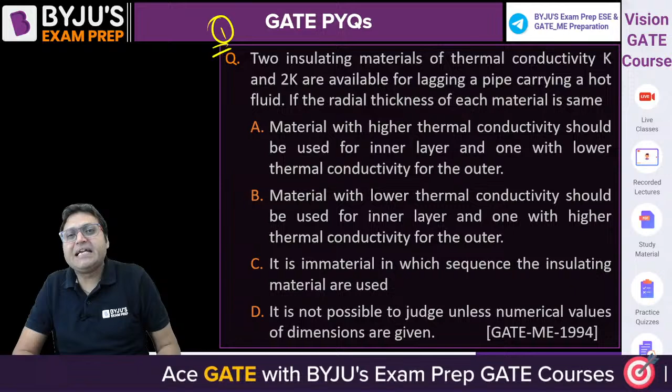So there is question number 1 on your screen. The question is from the critical insulation. There are two insulating materials of thermal conductivity K and 2K, which are available for lagging a pipe. What is lagging? Lagging is called as heavy insulation. And lagging reduces the heat transfer rate. So these two materials are available for lagging a pipe which is carrying a hot fluid. If the radial thickness of each material is same, what will be the answer? This question was asked in GATE 1994.

So option A says material with higher thermal conductivity should be used for inner layer and one with lower thermal conductivity for the outer layer. Material with lower thermal conductivity should be used for inner layer and one with higher thermal conductivity for outer layer. It is unimportant whatever the sequence of the insulating material used. And option D says it is impossible to judge unless the numerical values of dimensions are given. Yes, tell me which of the following options is correct. There are two parameters. One is lagging. Lagging is called as heavy insulation.

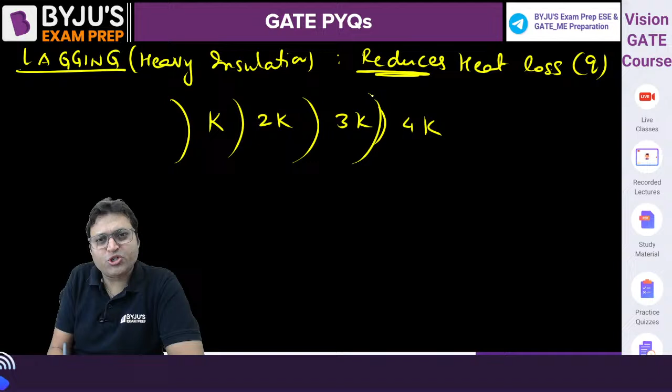It reduces heat loss. Lagging reduces heat loss or heat transfer rate. To decrease the rate of heat transfer, to reduce the heat transfer rate, the material with the lower thermal conductivity should be the inner layer, and then 2K, then 3K, and like this 4K. This should be the order of the insulation.

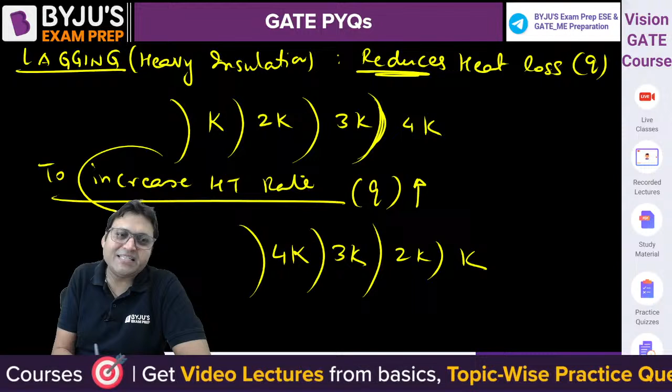But if we want to increase the heat transfer rate, how should the insulation be done? The material with the higher thermal conductivity should be the first material, then 3K, then 2K, then K, like this. So if our objective is to increase the rate of heat transfer, then the 4K material should be the inner layer, 3K the outer layer, 2K the next outer layer, and so on.

But because the question is all about lagging, this is where people commit mistakes. They do not understand. Lagging means heavy insulation which reduces the heat loss. So the objective of lagging is to reduce the rate of heat transfer. And if you want to reduce the rate of heat transfer, the first material should be highly insulating, meaning it should have the least value of thermal conductivity. B is the answer, Kumar.

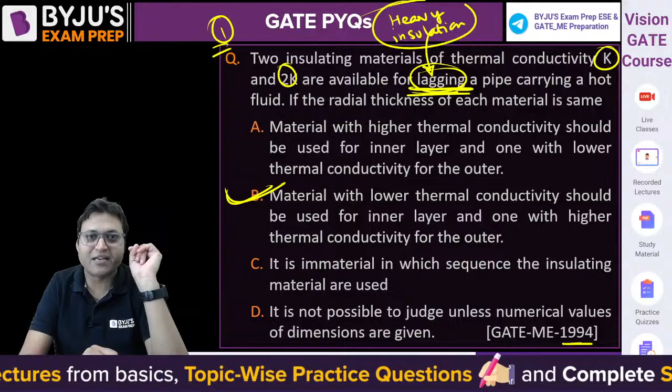Lagging means heavy insulation. Think of it like this: the first material is the highly effective material. If we want to insulate a system, the first insulating material will be the highly effective one, then the second will be less effective, the third less effective. So if the objective is to increase the rate of heat transfer, the material with the highest thermal conductivity will be the first material. But if the objective is to reduce the rate of heat transfer, the highly insulating material should be the first material.

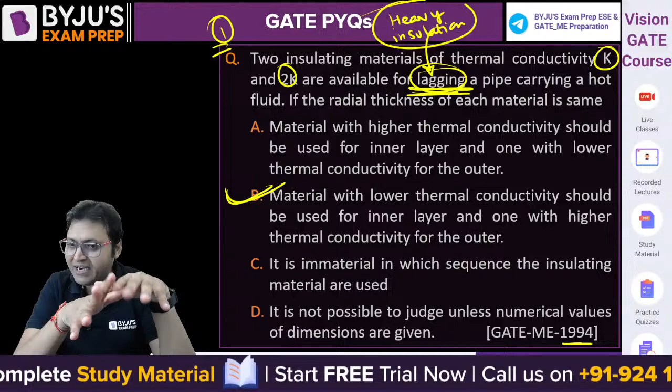So B will be the correct answer because of the word lagging which is mentioned over here. I hope it is clear, right? Can we proceed further?

Now the next question. For a given heat flow and for the same thickness, the temperature drop across the material will be.

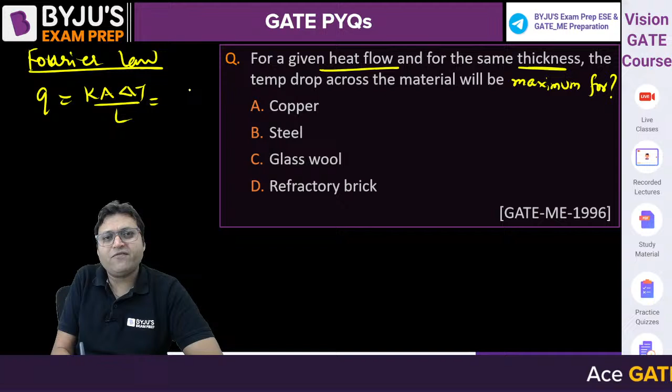So can we say, according to Fourier law? Fourier law is used for conduction. So Q is equal to KA delta T by L. For the given heat flow, Q is constant. Same thickness, L is constant. Area is not mentioned, so it will be taken as constant. So delta T is inversely proportional to K. As K increases, delta T will decrease.

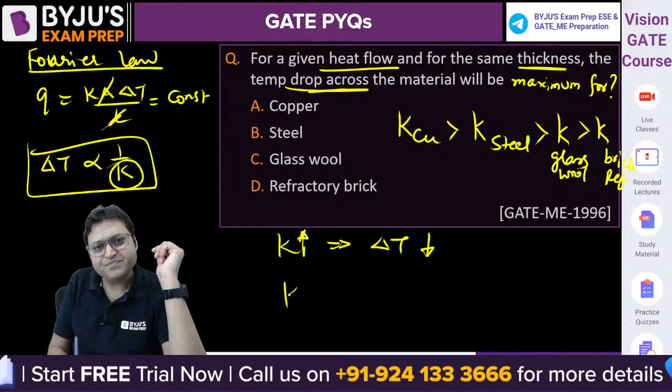Thermal conductivity for copper is maximum, it is a pure metal. Then steel, that is an alloy. Then glass wool. And then refractory brick, it is highly insulating. So if we want the temperature drop to be maximum, the material will be refractory brick. It is a thermal insulator, used for insulating furnace walls. So D will be better.

People have a doubt in C and D. Glass wool will have more thermal conductivity. Refractory brick will have the least value of thermal conductivity. That is why option D will be the answer. I hope it is clear, right? Yes. Ritika, Rajput, Maniket, D will be the answer.

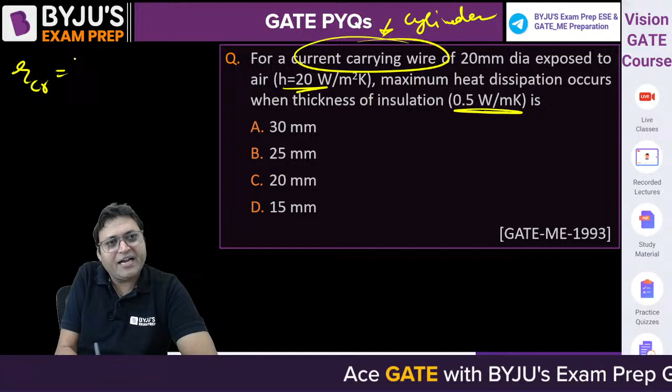The insulating material has a thermal conductivity. So the critical radius of insulation is K of the insulating material upon H0. What is the thermal conductivity of the insulating material? 0.5. What is H0? That is 20. What is 0.5 by 20?

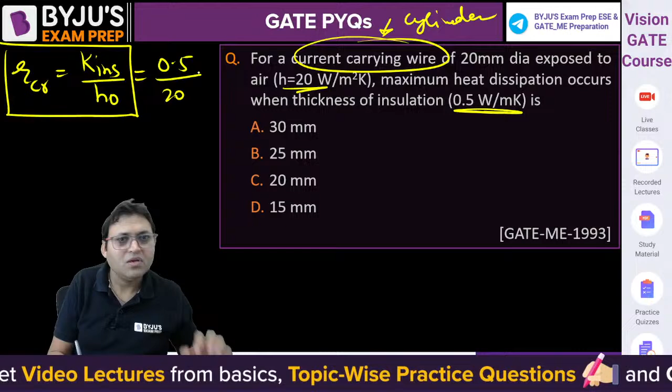Or that is meter. So it will be 500 by 20 millimeter. That is RCR. So critical radius of insulation is 25 mm. Now, where people commit mistakes: it is the thickness of insulation which is asked. It is not the radius of insulation which is asked.

So, critical thickness of insulation is RCR minus R0. Critical thickness of insulation: 25 minus... diameter is 20 mm. D0 is equal to 20 mm, so R0 will be equal to 10 mm. Do not commit these types of mistakes. 25 minus 10 mm, that will be the critical thickness of insulation. 15 mm will be the answer. D will be the answer.

Yes, well done. Maniket, what happened? Yes, Rajput, D will be the answer. Kumar, it is not B, it is D.

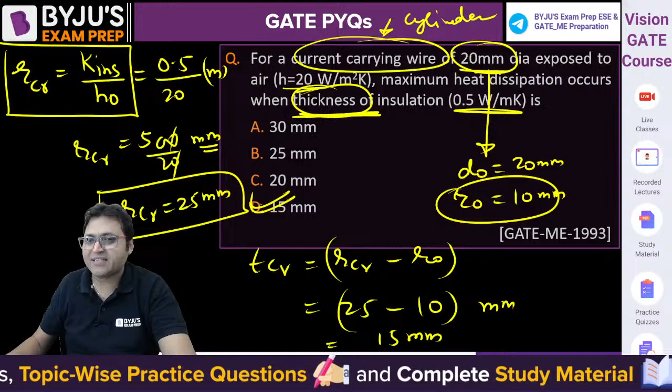It is about the critical thickness, not the critical radius, which was asked in GATE 93. I hope it is clear. So do not misunderstand the question and do not commit silly mistakes. The next one,

asked in GATE 1998. The temperature variation under steady state heat conduction across a composite slab of two materials. There is a composite slab in series combination, isn't it? These slabs are connected in series like this, and heat flow is taking place like this. Q will remain constant because it is a series combination, with thermal conductivities K1 and K2. The first material has thermal conductivity K1 and the second has K2.

Then which of the following statements holds true? K1 cannot be equal to K2. K1 cannot be 0. Now, we can say Q is equal to minus KA into dT by dx is constant, because Q is constant due to the series combination. Area is also constant. There is no heat generation. There is no heat stored in the system. That is why Q, the rate of heat transfer, will be constant.

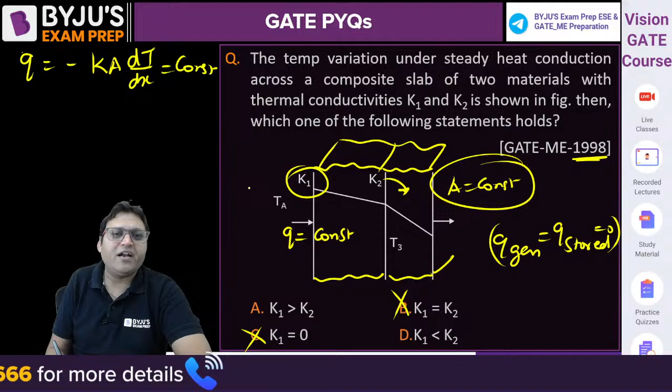So we can say K will be inversely proportional to dT by dx. dT by dx is the slope. So the more the slope, the less will be K. Here the slope is less for material 1, do you agree? More horizontal means less slope. So dT by dx for 1 will be less than dT by dx for 2, which means K1 will be greater than K2.

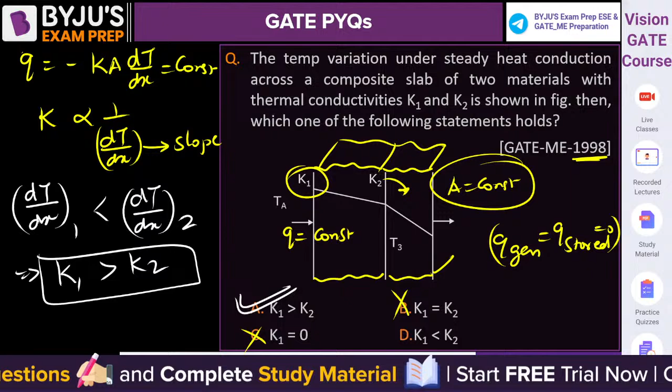Option A, yes, everybody gave me the correct answer. Hi Shiva, Maniket, Rajput, Kumar, well done guys, keep it up. Everyone, please do participate. Again, the question is from insulation. Earlier, a lot of questions used to be asked from critical insulation. Now, what will be the answer to this one?

This was asked in GATE 1999. It is proposed to coat a 1 mm diameter wire, so R0 is 0.5 mm, with enamel paint. The thermal conductivity of the paint is 0.1, to increase the heat transfer with air. If the air side heat transfer coefficient H is 100, the optimum thickness of enamel paint should be?

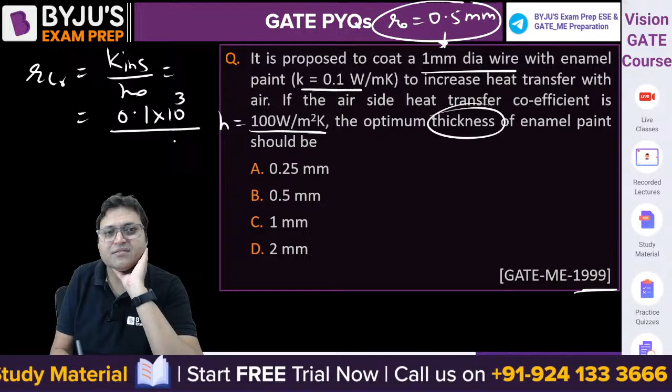Find out RCR first: K insulation by H0. What is K insulation? That is 0.1 into 10 to the power 3 if we want to convert it into millimeter, upon H, that is 100 millimeter. So it is 100 by 100, that is 1 mm. RCR will be equal to 1 mm, and critical thickness is RCR minus R0. So 1 minus 0.5 mm.

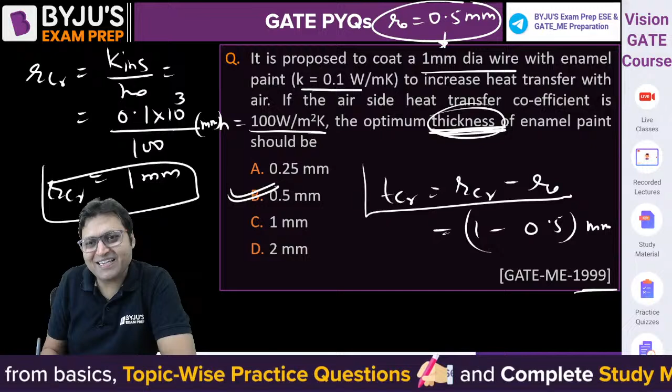B will be the answer. Why are you guys saying C? Thickness, thickness, thickness. Critical thickness or optimum thickness is RCR minus R0.

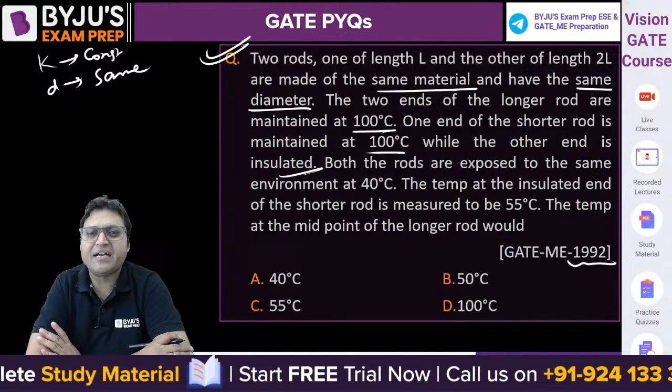Both rods are made up of the same material, which means thermal conductivity is constant for both, and they have the same diameter. The two ends of the longer rod are maintained at 100 degrees Celsius. One end of the shorter rod is maintained at 100 degrees Celsius while the other end is insulated. Both rods are exposed to the same environment at 40 degrees Celsius.

H is also constant. Which chapter is this question from? The question is from fin theory.

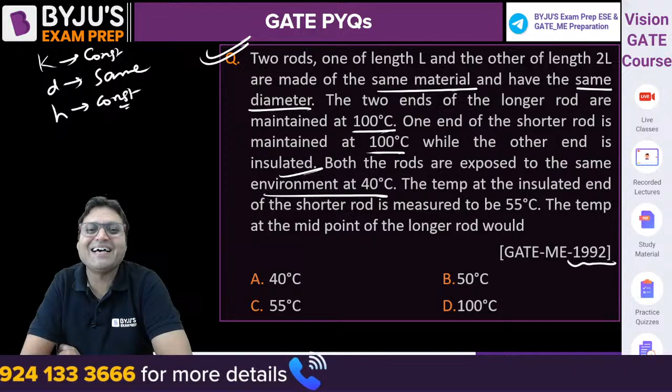Well done. The temperature at the insulated end of the shorter rod is measured to be 55 degrees Celsius. What is the temperature at the midpoint of the longer rod?

Tell me, what should be the answer? Which formula are you supposed to apply here? What will be the answer to this one? Can you give me the answer? Everybody, please give it a try.

Whenever a rod, a bar, or a fin is exposed to the environment, one end of the rod or the bar is at a temperature source or heat source, and the other end, with its periphery, is exposed to the environment - this is a case of fin theory.

What should be the answer? Look, if there is a rod connected to a heat source at both ends - this is Ts, this is Ts - the length is, let us say, 2L.

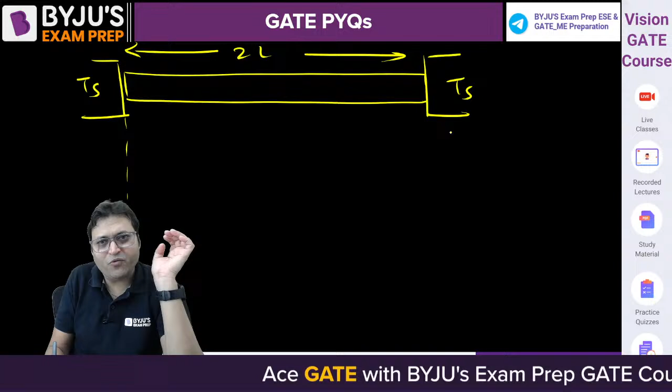If we draw the temperature profile, then it will look like this. This is Ts, this is also the same temperature Ts, and the temperature is minimum here at the center. This is how the temperature profile looks, and Q will be 0 here at the center.

So this longer rod can be replaced by two rods, because at this point Q is equal to 0, which means we can assume it to be insulated. So it can be treated as two shorter rods of length L.

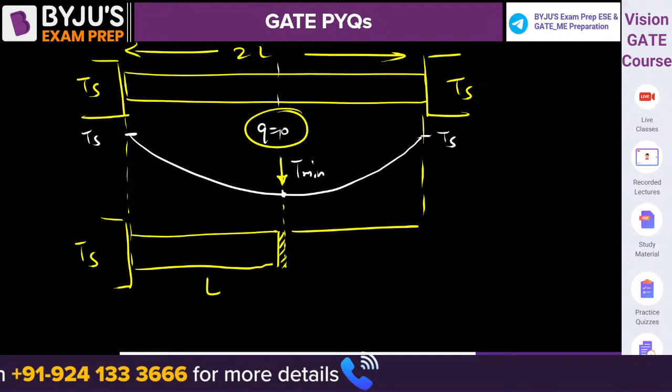One end is maintained at Ts temperature and the other end is insulated. And there is another rod of the same length L, with one end exposed to this and the other end insulated. So the temperature profile will be the same for these.

Now the question says - what does the question say? The temperature at the insulated tip is 55 degrees Celsius. Don't you think that this temperature is 55 degrees Celsius?

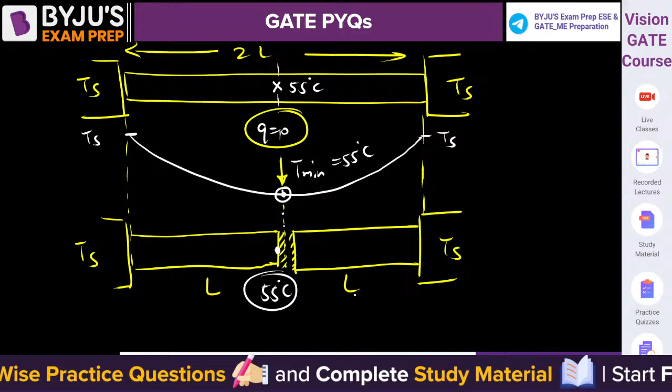If the temperature at the insulated tip for the shorter rod is 55, then at the midpoint of the longer rod the temperature will also be 55 degrees Celsius. Won't it be? Do you guys understand it or not?

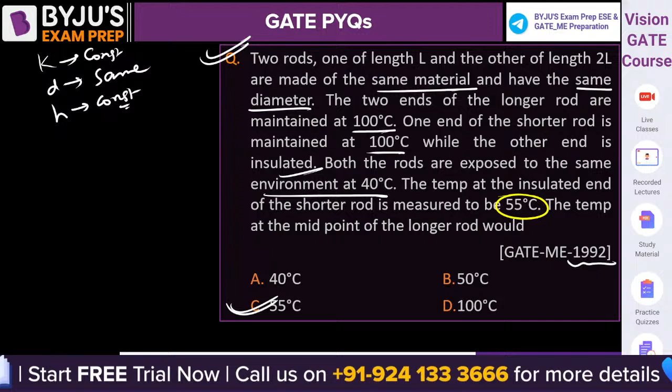So it is not about any calculation as such. The question is not about any type of calculation, but if you understand the basic concept that the longer rod can be treated as two small rods joined together at the insulated tip, then the temperature profile will be the same for both situations.

I hope it is clear. Yes or no? Please do let me know if it is clear or not. Is this all clear to everyone? Can we proceed further? Did you understand? 55 degrees Celsius will be the answer.

The next question was asked for 5 marks. Let us try to solve this one. Some of the subjective questions are also important to improve your understanding, so this is the subjective type of question.

Earlier there used to be some questions in GATE which used to be asked for 5 marks, so this is one of those questions. There is an iron rod - rod means it is again the fin theory.

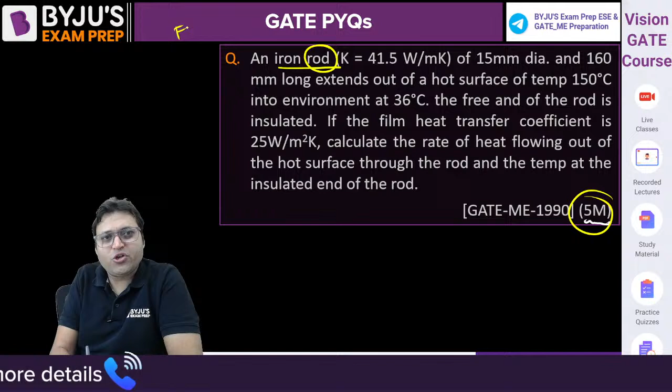There is an iron rod. Rod means a cylindrical shape. Thermal conductivity is given, diameter is 15 mm and length is 160 mm.

It is a finite length fin. It extends out of a hot surface of temperature 150 degrees Celsius, that is Ts, into the environment, that is T infinity. The free end of the rod is insulated.

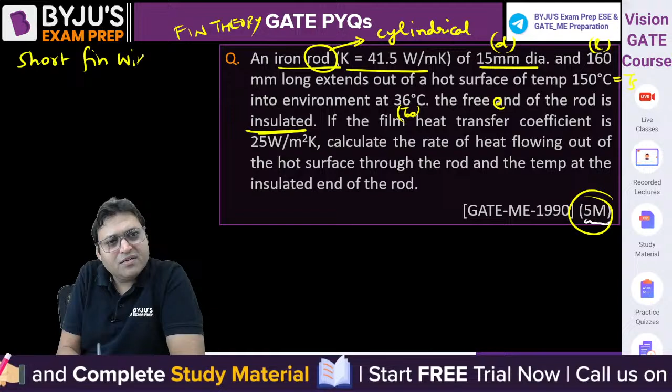It is an example of a short fin with insulated tip. This is an example of a short fin with insulated tip.

If the film heat transfer coefficient, that is H, is given as 25 watt per meter square Kelvin, calculate the rate of heat flowing out of the hot surface through the rod and the temperature at the insulated end of the rod. So we need to find two things: Q fin and the temperature at the tip, or minimum temperature - the temperature at the insulated tip.

These are the two things which need to be calculated. Q fin is equal to K into cross sectional area A into M into theta s into tan hyperbolic ml. This will be the formula for Q fin. And T at tip minus T infinity upon Ts minus T infinity is equal to 1 upon cos hyperbolic ml. This will give you T tip.

These are the two formulas to be used. First of all, find out the value of M. Can you find out the value of M? M is equal to under root of HP by K into cross sectional area, where P is the perimeter. For a circular cross section fin, it will be 4H by K into diameter. What is the value of M?

That is the fin constant, with unit meter inverse. Take under root of 4 into H, putting all parameters in SI units. Thermal conductivity is 41.5, diameter D is 15 mm, that is 0.015 meter. What is the value of M? Do find the value of M, in meter inverse. That is called the fin constant, also known as the fin parameter.

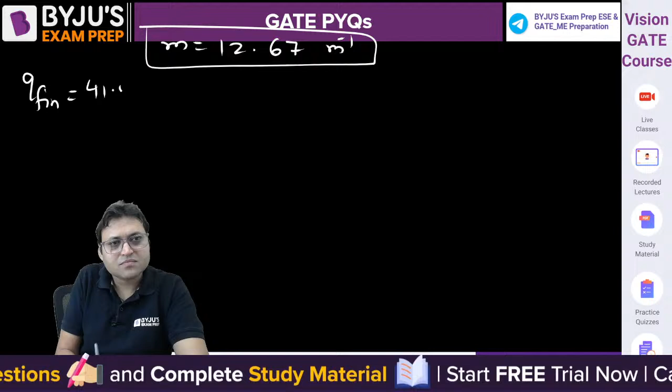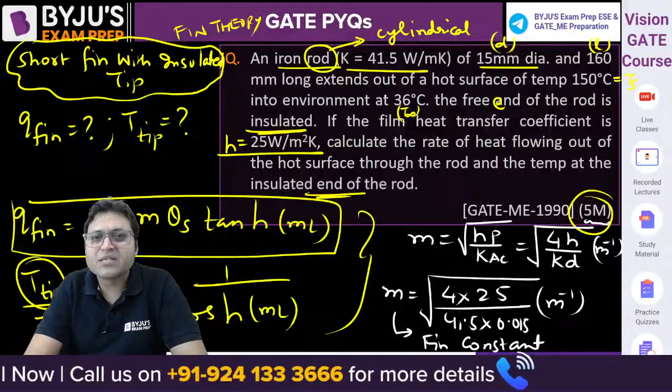Then Q fin is equal to K, where K is the thermal conductivity of the fin, which is 41.5, into area pi by 4 into 0.015 square, into M which is 12.67, into theta s, that is Ts minus T infinity. Ts minus T infinity is 150 minus 36, into tan hyperbolic of 12.67 into L. What is L? L is 160 mm, that is 0.16.

0.16. What will be the final answer for Q fin? Can you do the calculation? Let me know the answer for Q fin: pi by 4 into 0.015 square into 41.5, with tan hyperbolic of 12.67 into 0.16, multiplied by 150 minus 36.

Are you getting 10.23 watt? Are you guys getting the final answer? It is something around 10.23 watt. That is Q fin.

And T at the tip minus T infinity upon Ts minus T infinity, that is 150 minus 36, is equal to 1 upon cos hyperbolic of m into L, where m is 12.67 and L is 0.16. So from here we can find out T tip. What is the value of T tip? Can you solve for T tip? See, 12.67 into 0.16, then cos hyperbolic of ml, then (150 minus 36 divided by this answer) plus 36.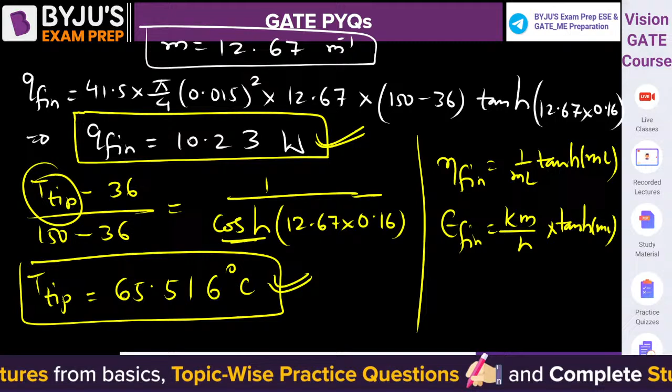65.6, 65.5 will be the answer. Right? Let us move to the next one.

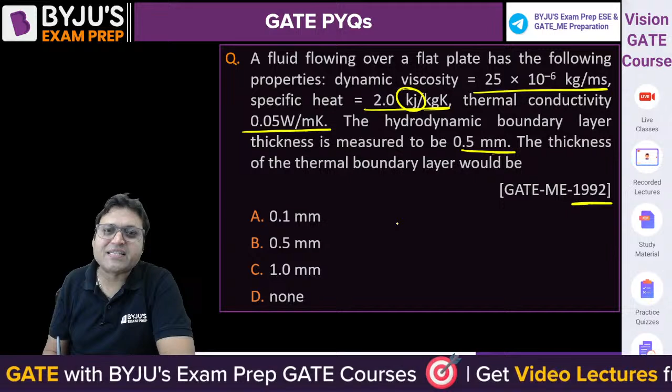Next is from convection. Solve this question and tell me. A fluid flowing over a flat plate - this was asked in GATE 1992. A fluid which is flowing over a flat plate has the following properties: dynamic viscosity is given by 25 into 10 to the power minus 6, specific heat in kilojoule is given, thermal conductivity is given. The hydrodynamic boundary layer thickness is measured to be 0.5 mm. The thickness of the thermal boundary layer is to be found. So the hydrodynamic or velocity boundary layer and the thermal boundary layer thickness are connected by Prandtl number, so we need to calculate the Prandtl number.

Hi Uma, welcome. I am all good.

How are you? So what is Prandtl number? Prandtl number is kinematic viscosity upon thermal diffusivity. What is kinematic viscosity? Dynamic viscosity per unit density. Alpha is K by rho into Cp.

If you simplify this, the Prandtl number expression is mu into Cp divided by thermal conductivity of the fluid. This is a property of the fluid. Calculate the value of Prandtl number using all the parameters in their SI unit.

Dynamic viscosity is 25 into 10 to the power minus 6. Cp is 2000 joule per kg Kelvin. Thermal conductivity is 0.05. What is the value of Prandtl number? Everyone, please solve for Prandtl number. What is the Prandtl number?

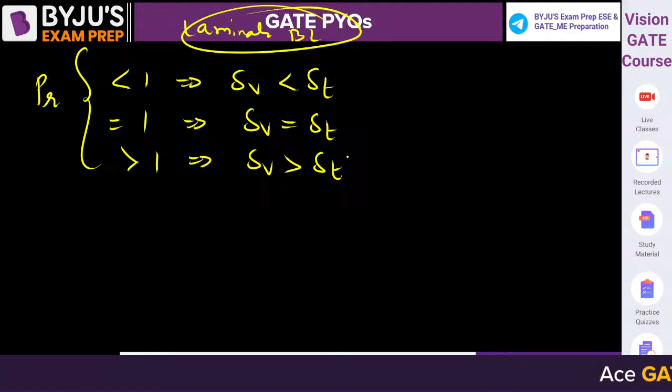For laminar boundary layer, when the Prandtl number is less than 1, then delta V is less than delta T. When Prandtl number is equal to 1, then delta V is equal to delta T. When Prandtl number is greater than 1, then delta V will be greater than delta T. This is how Prandtl number is related to boundary layer thickness.

Prandtl number should come out as 1. Is it not coming as 1? It should be 1. Is it coming as 1 or 10,000? Maniket, is it 1 or 10,000?

25 into 2000, put all the parameters in their SI unit. 2 kilojoule needs to be converted to joule per kg Kelvin. This is the mistake students often make. Put all the given parameters in their SI unit only.

So that is 1, because the Prandtl number is equal to 1, then delta V is equal to delta T. If the hydrodynamic boundary layer thickness is 0.5 mm, then the thermal boundary layer thickness will also be 0.5 mm.

Yes, the answer B is correct. B will be the right answer. Getting it? So it does not matter.

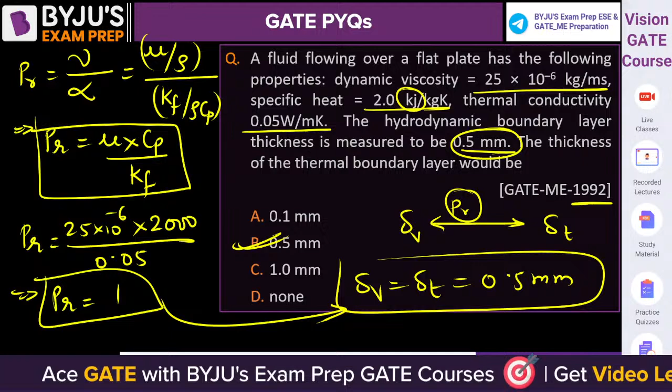It does not matter whether the boundary layer is laminar or turbulent, because for turbulent boundary layer, delta V is always equal to delta T. It is not a function of Prandtl number. For turbulent boundary layer, delta V is always equal to delta T, irrespective of the Prandtl number.

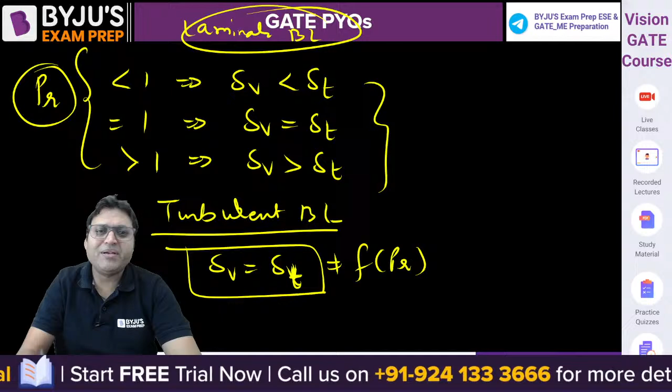But if it is laminar boundary layer, then Prandtl number decides. Since Prandtl number is coming out to be 1 only, it means delta V is equal to delta T, whether it is a laminar boundary layer or a turbulent boundary layer. It does not matter. I hope this is clear.

The next one, can you match the following?

What is Grashof number? Grashof number is the ratio of buoyant force to viscous force, isn't it? Reynolds number is the ratio of inertia force to viscous force. Here, inertia force is replaced by buoyant force, and Reynolds number is used in forced convection.

And Grashof number is used in free or natural convection. So Grashof number is in free convection, 3, A3. A3. Schmidt number, what is Schmidt number?

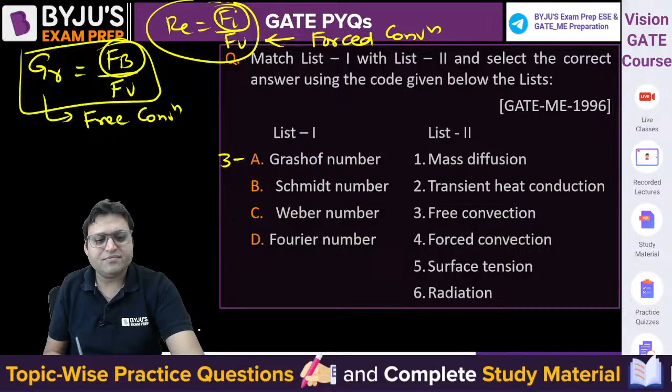Look, there are three properties: kinematic viscosity, thermal diffusivity, and mass diffusivity. Kinematic viscosity is momentum diffusivity. Thermal diffusivity is alpha, and mass diffusivity is D. All of these have the same unit, meter square per second.

So Prandtl number is equal to kinematic viscosity by alpha. Lewis number is equal to alpha by D. This is Prandtl number, this is Lewis number, the ratio of alpha by D. And Schmidt number is equal to kinematic viscosity by D, mass diffusivity.

That is called Schmidt number, so it is used in mass transfer. Lewis number and Schmidt number are both used in mass transfer.

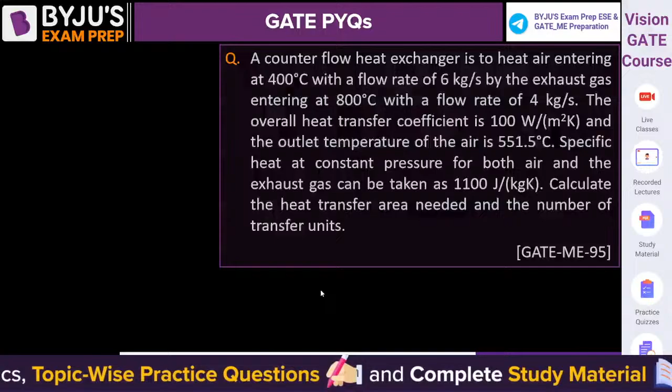So for B, Schmidt number is for mass diffusion. B1.

Weber number comes from fluid mechanics. Weber number is related with surface tension. What is Weber number? Weber number is the ratio of inertia force by surface tension force, under root. So here it is the surface tension.

So C5. And Fourier number is used in transient heat conduction. What is Fourier number? It is the ratio of thermal conductivity to heat transfer, or the ratio of conduction to the heat storage capacity, used in transient heat conduction.

3152. Yes, Rajput, well done. 3152. Yes, Shiva, good. 3152.

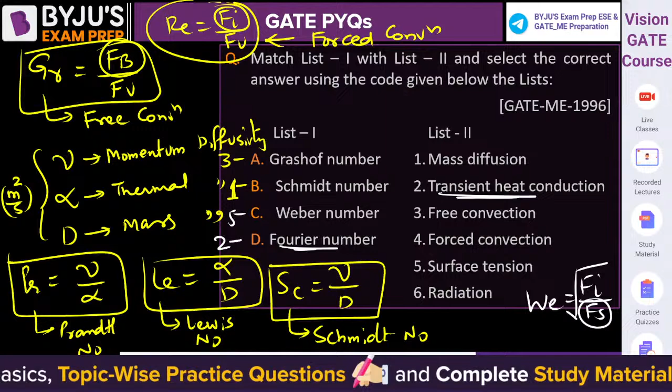Is there buffering happening? Is it buffering? Are you facing issues?

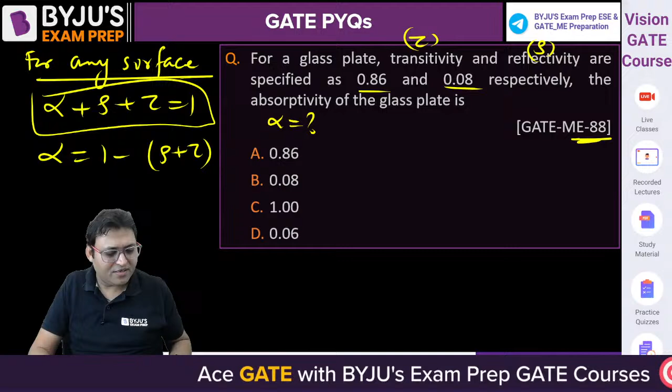So 1 minus, answer 0.06. D will be the correct answer. What is a diffuse radiation surface? When do we call the surface to be diffuse? Radiation in all the direction, that is called as diffuse. The opposite of specular surface, if the radiation is taking place in all the direction, it is called as diffuse surface. So radiation intensity independent of angle.

Radiation intensity independent of angle. It is same in all the direction. That is called as diffuse radiation. Option A. Yes, Shiva Rajput, A will be the correct answer. And there is another surface which is called as gray surface. Gray surface, the radiation independent of wavelength. That is called as gray surface.

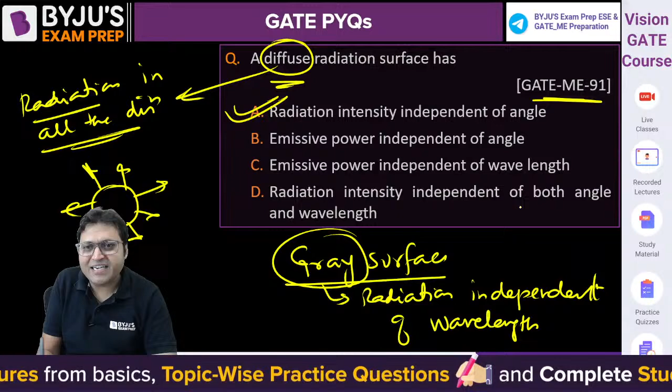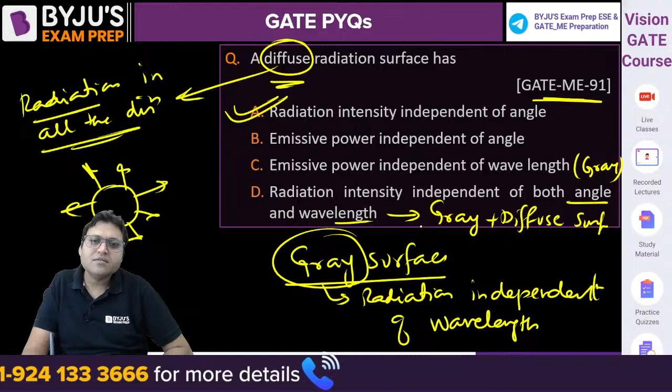So the surfaces we analyze in our radiation, we assume the surface to be diffuse and gray. So if the radiation intensity is independent of both the angle and wavelength, that is called as diffuse and gray surface. D will be for gray plus diffuse surface. Emissive power independent of wavelength, that is called as gray. So A will be the answer, right?

The next one, this was asked in GATE 94. The shape factors with themselves of two infinitely long black body concentric cylinders. This is 1, this is 2. The surface 1 is insulated from inside and surface 2 is insulated from outside.

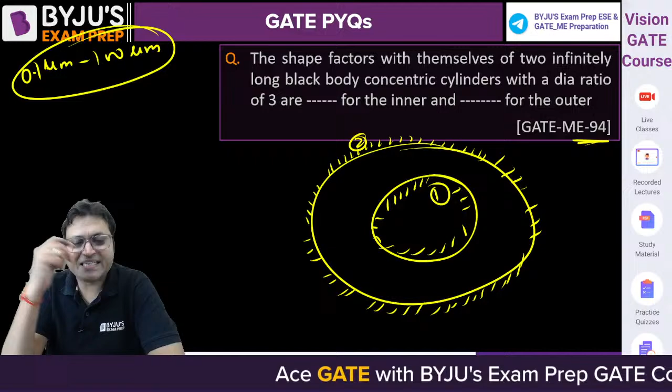The shape factor with themselves of the two infinitely long black body concentric cylinders with the diameter ratio D2 by D1 equal to 3. For the inner, what is the self shape factor? Shape factor with themselves means self shape factor. So F11, inner means F11. Isn't it 0 because it is convex? It will be 0 for the inner. And what is F22? This can be treated as enclosure. So F22 is 1 minus A1 by A2, so 1 minus pi D1L by pi D2L, 1 minus D1 by D2.

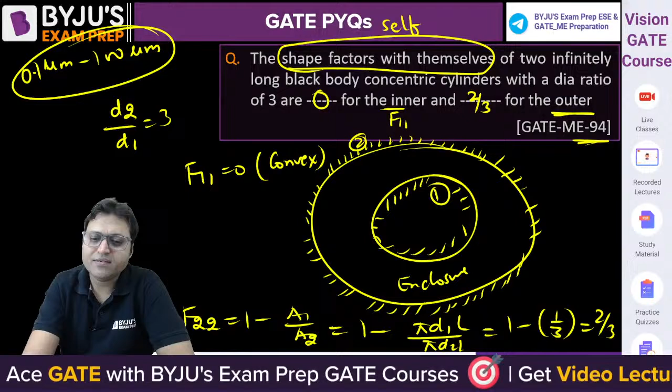What is D1 by D2? That is 1 minus 1 by 3, that is 2 by 3. So for the outer surface, it will be 2 by 3. For the inner surface, it will be 0. 0 and 2 by 3. Clear? Right? The next one.

The radiative heat transfer rate per unit area, that is Q dash flux, radiation heat flux between two plane parallel gray surfaces. They are plane parallel gray surfaces. It means A1 is equal to A2 is constant A.

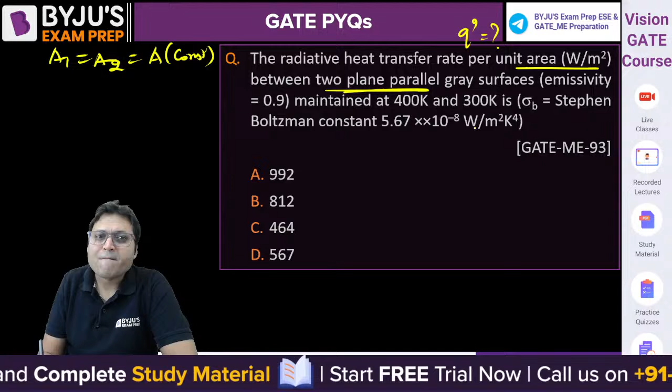Emissivity of both are 0.9. Epsilon 1 is equal to epsilon 2 is 0.9. That is epsilon. Maintained at 400 Kelvin and 300 Kelvin, T1 and T2. So can we say Q is equal to sigma (T1 to the power 4 minus T2 to the power 4) upon (1 minus epsilon 1 upon epsilon 1 A1 plus 1 upon A1 F1-2 plus 1 minus epsilon 2 upon epsilon 2 A2).

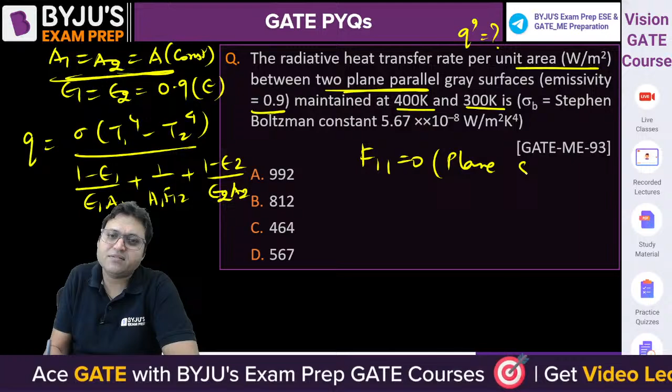Because A1 is equal to A2 and F1-1 is equal to 0 because they are plane surfaces, F1-2 is equal to 1. So from here we can say Q dash, which is Q by A, with epsilon 1 equal to epsilon 2, is sigma into (T1 to the power 4 minus T2 to the power 4) upon (2 by epsilon minus 1). This is the formula we are supposed to apply. Can you apply the formula and get me the answer?

Sigma is 5.67 into 10 to the power minus 8. T1 is 400, T2 is 300, epsilon is 0.9. (400 to the power 4 minus 300 to the power 4) upon (2 upon 0.9 minus 1) watt per meter square. What will be the answer in watt per meter square? Can you solve it? Everyone, please give it a try and let me know the answer. Yes, quickly do let me know the answer.

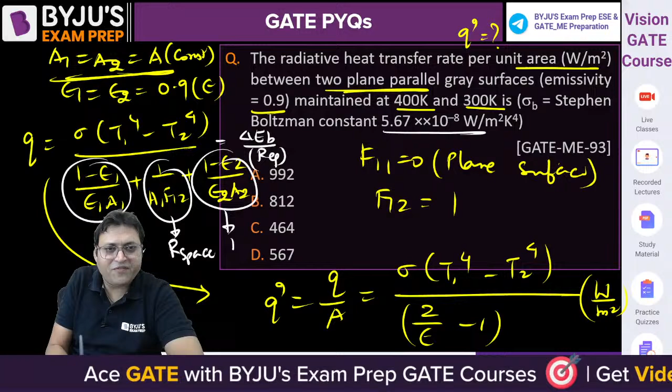Waiting for your answer, guys. Have you understood the concept? This is delta EB upon R equivalent. There are three resistances. This is the surface resistance, this is space resistance, and this is again the surface resistance. Because they are connected in series, so equivalent resistance. Are you getting 812? B will be the answer, 812. Yes, Shiva, well done, good. What about others?

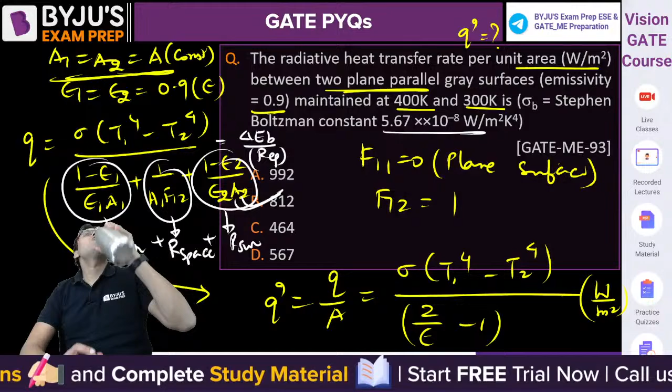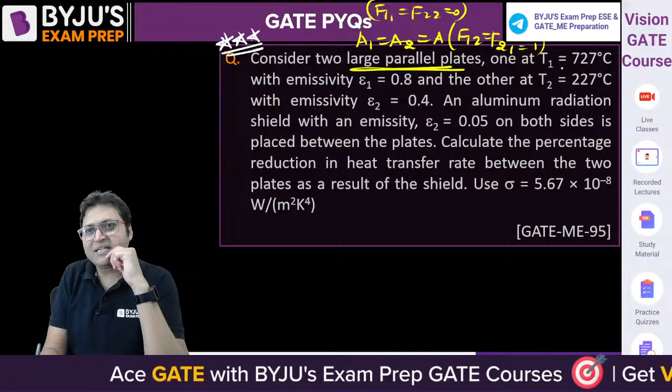The next one. This is a wonderful question. Try to solve this one. Consider two large parallel plates. Again, A1 is equal to A2 is equal to A. F1-2 is equal to F2-1 is equal to 1, because F11 is equal to F22 is equal to 0. Temperature T1 is 727 degrees Celsius. Temperature T2 is 227. Epsilon 1 is 0.8, epsilon 2 is 0.4. They are not same now. Epsilon 1 and epsilon 2 are different.

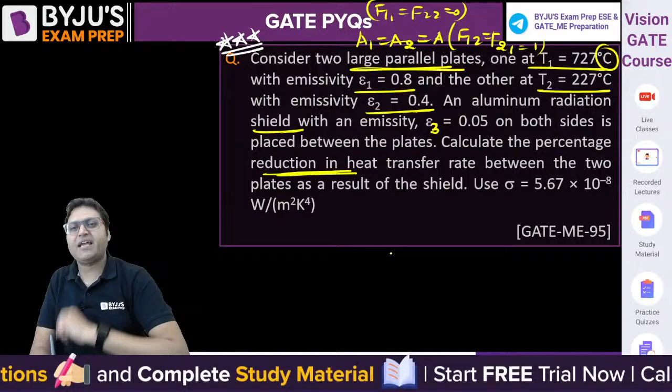An aluminum radiation shield with an emissivity epsilon 3 of 0.05 on both sides is placed between the plates. Calculate the percentage reduction in the heat transfer rate between the two plates as a result of the shield. Use sigma is equal to 5.67 into 10 to the power minus 8. Can we say Q is delta EB upon radiation thermal resistance? So Q is inversely proportional to radiation thermal resistance. So what we need to find out is,

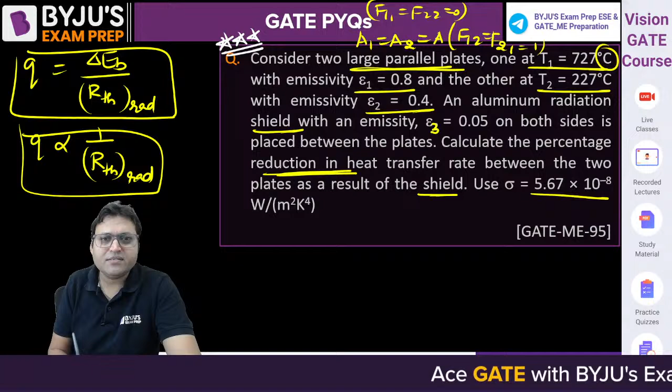Q without shield minus Q with shield upon Q without shield into 100 we need to calculate. So it is 1 minus Q with shield upon Q without shield, into 100. Or we can say that is equal to 1 minus thermal resistance without shield upon thermal resistance with shield.

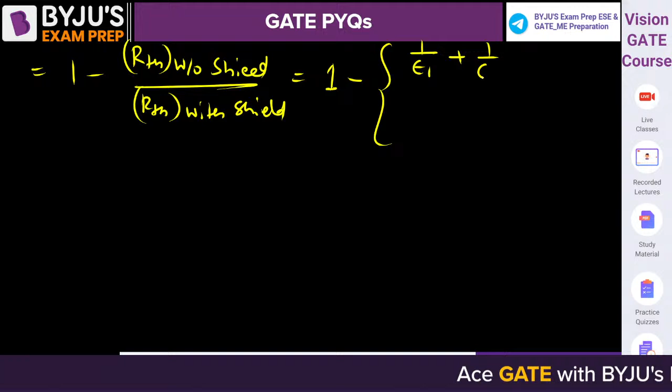So that is equal to 1 minus, what is the thermal resistance without shield? When there is no shield, 1 upon epsilon 1 plus 1 upon epsilon 2 minus 1, that will be the thermal resistance. Then with the shield this will be 1 upon epsilon 1 plus 2 upon epsilon 3 plus 1 upon epsilon 2 minus 2, isn't it? So put the values, you will get the answer. That will be the percentage reduction.

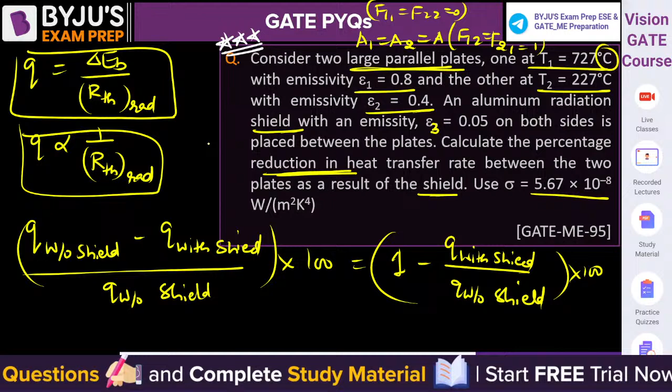1 minus 1 upon, what is epsilon 1? 0.8, epsilon 2 is 0.4, 0.05. 1 upon 0.8 plus 1 upon 0.4 minus 1 is the numerator. 1 upon 0.8 plus 2 upon 0.05 plus 1 upon 0.4 minus 2. Can you solve this into 100? What will be the answer? Can you solve it and let me know the answer?

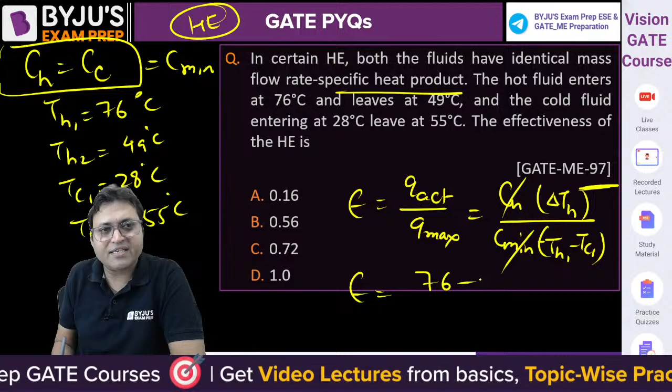Q actual is equal to QH is equal to CH into delta TH. And Q maximum is C minimum into TH1 minus TC1. Can we call it C minimum because CH is equal to CC? CH and C minimum get cancelled out. Effectiveness is delta TH, 76 minus 49, TH1 minus TH2, and the denominator will be 76 minus 28.

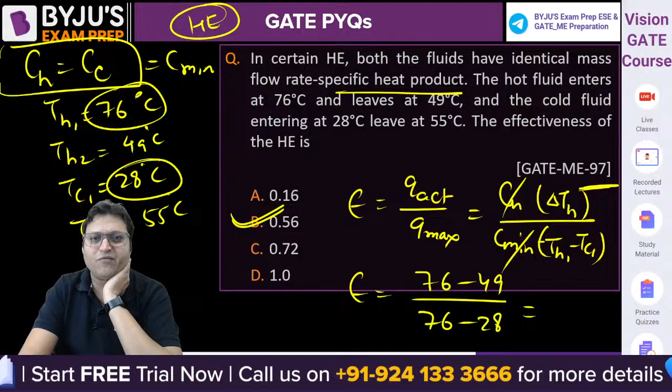What will be the effectiveness? Isn't it 0.56? B is the correct answer. Q actual upon Q maximum. That is the effectiveness of the heat exchanger, 0.56 something. The next one.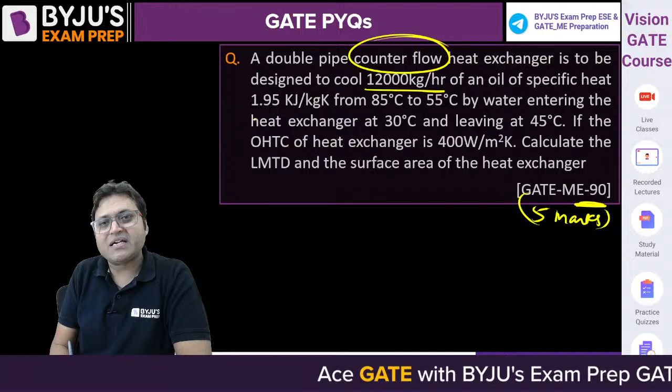A double pipe. This was asked in GATE 90 for 5 marks. Let us solve. A double pipe counterflow heat exchanger is to be designed to cool 12,000 kg per hour of an oil. Hot fluid is oil. It is getting cooled. The mass flow rate of the hot fluid, m dot h, is equal to 12,000 kg per hour. Convert it into kg per second.

Specific heat CH is equal to 1.95 kilojoule per kg Kelvin. From 85 to 55, TH1 is 85 degrees Celsius and TH2 is 55 degrees Celsius. The cold fluid is water, entering the heat exchanger at 30 degrees Celsius. TC1 is 30 and TC2 is 45. If the overall heat transfer coefficient is 400 watt per meter square Kelvin, calculate the LMTD.

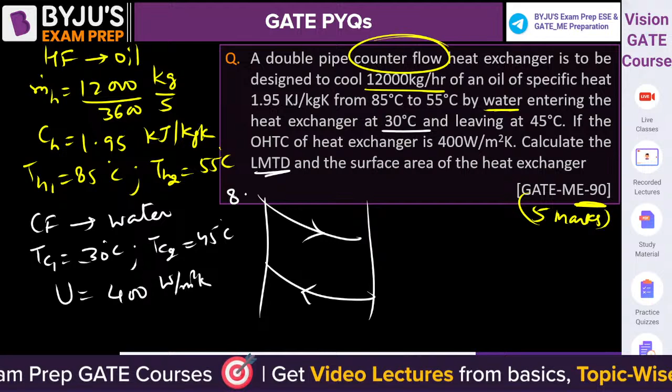LMTD is very simple. It is a counterflow heat exchanger. All the terminal temperatures are given, 85, 55, 30, 45. Can you find out LMTD? So delta Tm is equal to 85 minus 45 minus 55 minus 30 upon natural log of 85 minus 45 upon 55 minus 30. That will give you the LMTD.

What is the value of LMTD? Are you getting 31.9 degrees Celsius? That is the mean temperature difference between hot fluid and cold fluid. LMTD is 31.9. No, 19.74 is wrong. 31.9 will be the value of LMTD.

And what is the surface area? So we can say Q is equal to CH into delta TH is equal to U into A into delta TM. Equate these two. Mass flow rate of hot fluid is 12,000 by 3600. Specific heat is 1.95, 1950, into delta TH. Delta TH is 85 minus 55.

Is equal to U, that is 400, into area into 31.9. Can you find out the value of A? The area will be equal to, are you getting 15.28 meter square or not? Are you getting 15? That area is wrong.

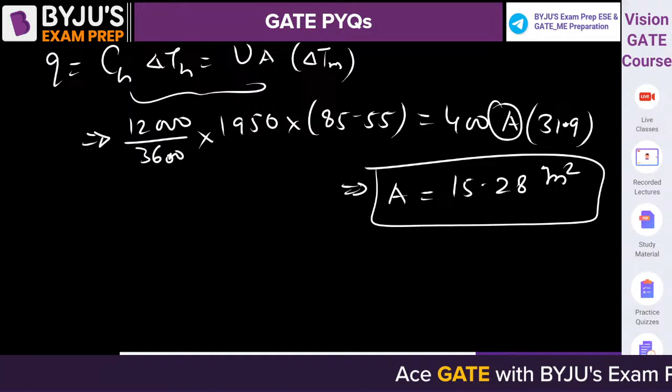Shiva, check where the mistake is happening. Is there any mistake in units or anything else? Put all the parameters in their SI units. Please check and do let me know. Are you getting 15.28 or not? 15.27, 15.28 will be the correct answer. I hope it is clear.

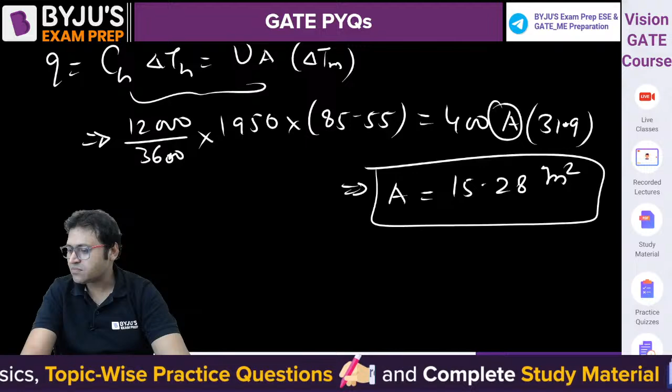The next one. Again, it is a counterflow heat exchanger, used to heat air entering it. Air is getting heated. Hot fluid is exhaust gases, entering at 800 degrees Celsius. TH1 is equal to 800 degrees Celsius, with a mass flow rate of the hot fluid of 4 kg per second, and the cold fluid is air, which is entering at Tc1 is equal to 400 degrees Celsius.

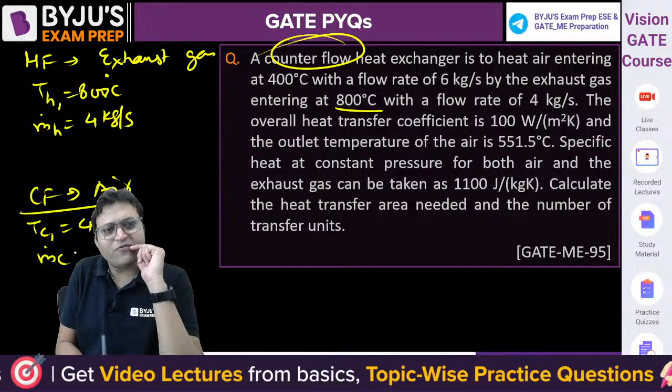Mass flow rate of cold fluid is 6 kg per second. These are the parameters given. The overall heat transfer coefficient U is equal to 100 watt per meter square Kelvin, and the outlet temperature of the air, Tc2, is given as 551.5 degrees Celsius. Specific heat at constant pressure for both air and the exhaust gases can be taken as Cp for the hot fluid equal to Cp for the cold fluid equal to 1100 joule per kg Kelvin. Calculate the heat transfer area needed and the number of transfer units.

So what we can do? We can first find out TH2. Can you find out TH2? So Q is equal to m dot H CH into TH1 minus TH2 is equal to m dot C CC into Tc2 minus Tc1. This specific heat will get cancelled out. Mass flow rate of hot fluid is 4 into 800 minus TH2 is equal to 6 into 551.5 minus 400. So find out TH2 first. What is the value of TH2? How much is TH2? Are you getting?

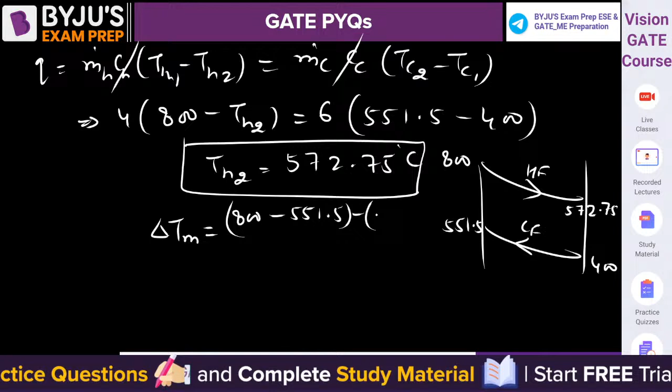So delta Tm is equal to 800 minus 551.5 minus 572.75 minus 400, divided by natural log of 800 minus 551.5 divided by 572.75 minus 400. If you find out LMTD, you must get LMTD to be 208.33 degrees Celsius. This is LMTD.

48 aa raha kya? Yes, the area will be 48.

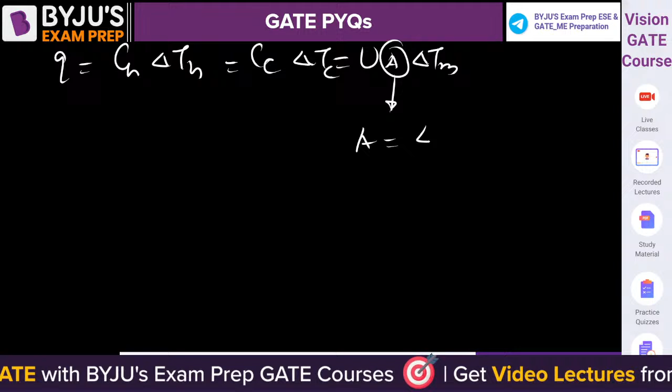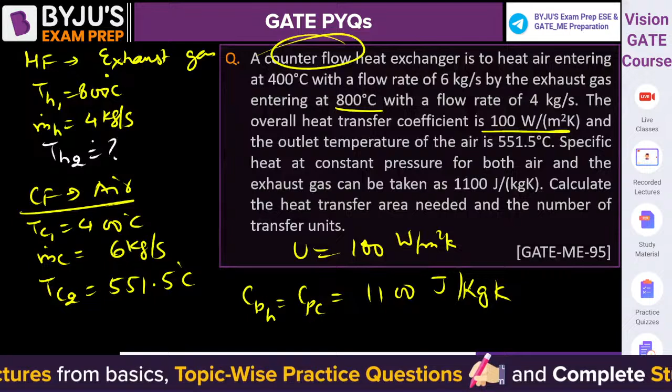Once you get LMTD, then you can say Q is equal to CH into delta TH, CC into delta TC, is equal to U into A into delta TM. From here the area will come out to be 48 meters square, and NTU is equal to UA by C minimum. What is C minimum? C minimum will be equal to CH, isn't it? So UA by C minimum: U is 100, area is 48, C minimum is mass flow rate 4 into specific heat 1100. This is NTU. NTU will come out to be 1.09. Please check and do let me know.

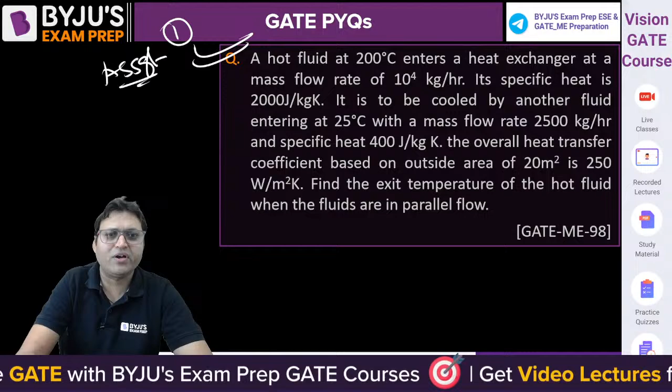Yes. So these are some assignment questions. Try to solve these questions. This is your assignment number 1. Try to solve these questions at home. This is your assignment number 2. These were asked for 5 marks in previous GATE papers. This is your assignment number 3. So these 3 questions you try, and if you have any doubt, you can always connect with me through the Telegram channel or my email ID. This is all from my side.

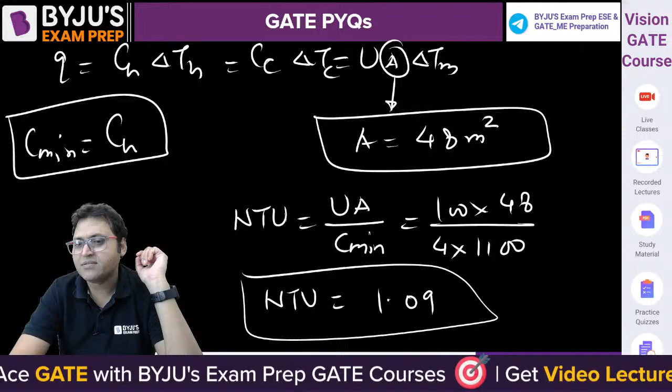Is it 12? 4800 by 4400, how? 4800 divided by 4400 is 1.09. NTU will be 1.09. It will be 1.09, right?